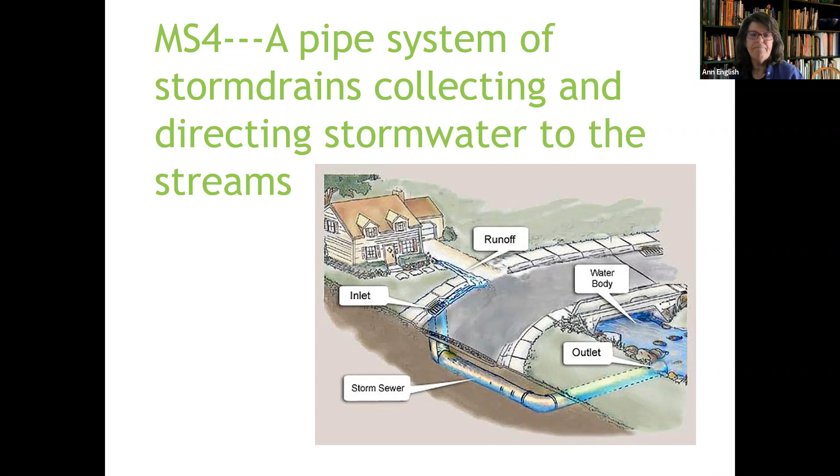So stormwater runoff happens once water hits the ground and doesn't soak in. So rainwater goes over the top of the ground, off of roofs, driveways, roads, and sidewalks. It picks up everything that it encounters along the way, including chemicals from our lawns.

Montgomery County has a new pesticide law, and some of the municipalities have accepted this as their law also, and others haven't. So you can check to see if you're in a jurisdiction that is following this pesticide law, or at least follow the practices on that county initiative. Chemical fertilizers actually contribute to climate change because of all the off-gassing and nutrients.

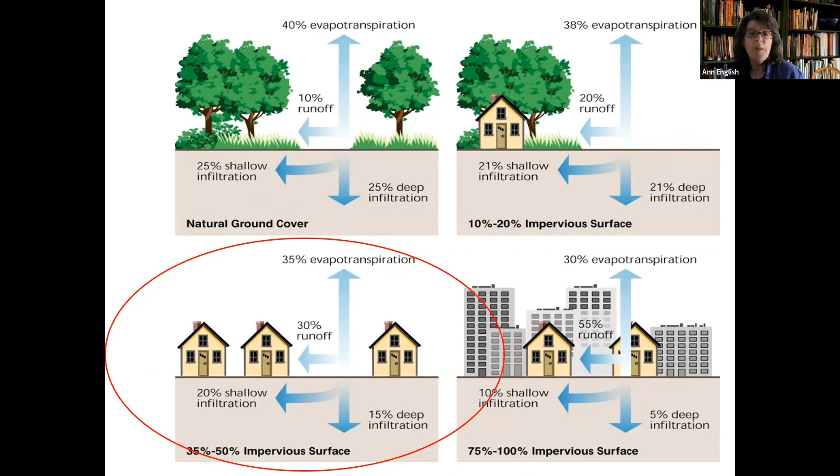So what happens with these rooftops and roads? 30 to 40% of total impervious area is just on rooftops alone, and that's on private property. And 25% is in the roadway. So that's almost 75, 80% on private property.

So people wonder, why do I have to do something? Why isn't there stream restoration? Why isn't that sufficient? I'm doing everything the way I was told to do it, and yet you're telling me I have to do more. And I'm telling you, that's right, you have to do more.

Because these impervious surfaces are part of our problem. That water flowing off a roof in the summer can reach 140 degrees. Have you ever stood in a gutter when it's raining in bare feet when you were a kid? It was hot when it first started raining and then it got cool. That's the temperature surge that hits our streams, and all those little bugs and little fish are very sensitive to temperature. That's why trout streams have to be cold, because the trout can't live in a hot stream.

If you've lived in this county for a while, you might have heard stories. One of our wildlife biologists, he's an aquatic biologist actually, said that his grandfather could catch trout in Sligo Creek. Imagine that, that highly degraded stream we've been working for decades to try to restore used to be clean enough for trout.

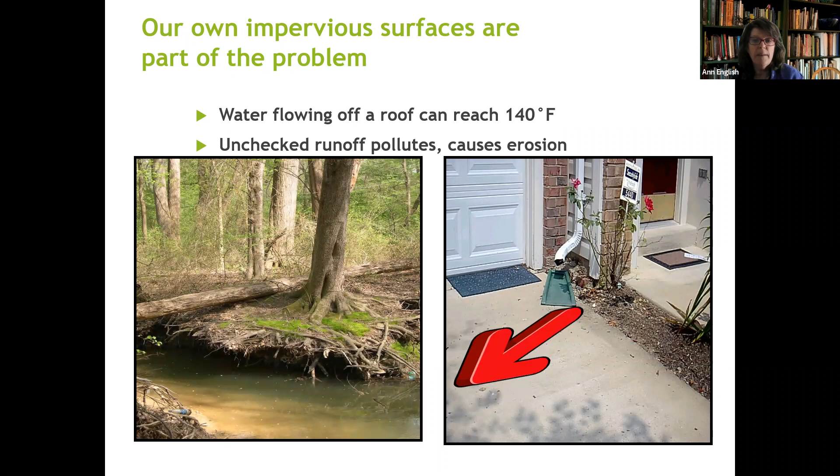What happens with this unchecked runoff, in addition to temperature, is you see the trees start to get undercut on the bank. And then you have tree failure. So what's the impact of it? Let's just go through the litany, shall we?

Trash, soil and sediment, fecal bacteria, that's from all that pet waste, nitrogen and phosphorus, oil. If you've ever watched people dump stuff down the storm drain, whether it's grass clippings or they've just changed the oil in their car, that's not a trash can, but people think it is a trash can. Road salt is also causing impacts in some of our streams, and it's also contaminating groundwater. And then toxic metals, copper could be from downspouts, lead and zinc typically from brake linings get on the road, and these all get flushed away down into our streams.

Just to give you the more visual graphic, this is what's in stormwater runoff. I was horrified when someone said, oh it's so great, we live in a neighborhood with a stormwater pond and the kids go swimming in it. I said, do you have any idea what your kids are swimming in? It's not nice, don't do it, don't let them in there. It's not clean water.

But in addition to all that volume carrying all that other stuff, what happens to the stream banks themselves? A stream bank is supposed to have a nice V-shaped profile. That's a healthy stream bank, because then as the water rises it can spread out, and maybe it's got extra nutrition. The Egyptians knew that in the Nile every year - the Nile would flood, it was a fertile river valley, and our valleys always got the extra nutrition, and those trees needed it. So now we're depriving the trees of that.

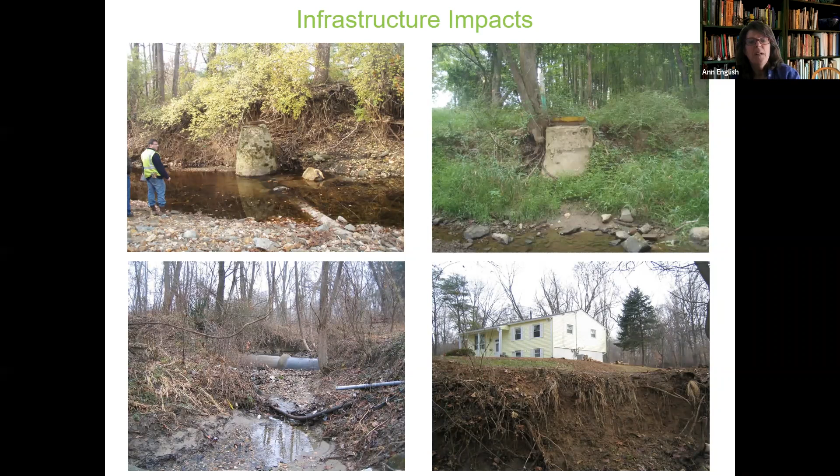So kids are probably running across that thinking this is a lot of fun, and maybe some wildlife too, but the fish can't move. People are losing parts of their yard. People are alarmed. In my professional life, I get videos when it rains and people are like, I've never seen this before. And with climate change, we're going to see it a lot more.

People that responsibly pick up their pet waste and put it in a bag and then set it down beside the path, that's not responsible. That's what happens to it. It hangs up in the tree roots, just all of this silt. One of our biggest contributors of suspended solids, which is silt, to the Chesapeake Bay pollution load from a county like ours is actually from our stream valleys, right from the stream itself, because this is being eroded and it moves downhill.

So it's interesting, I had reordered that slide. Infrastructure was built to be efficient, so you go straight. Now we want it to meander. We want it to meander.

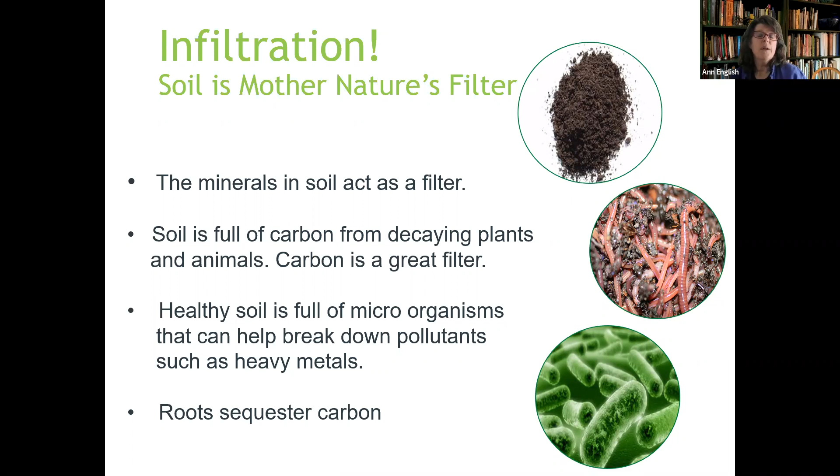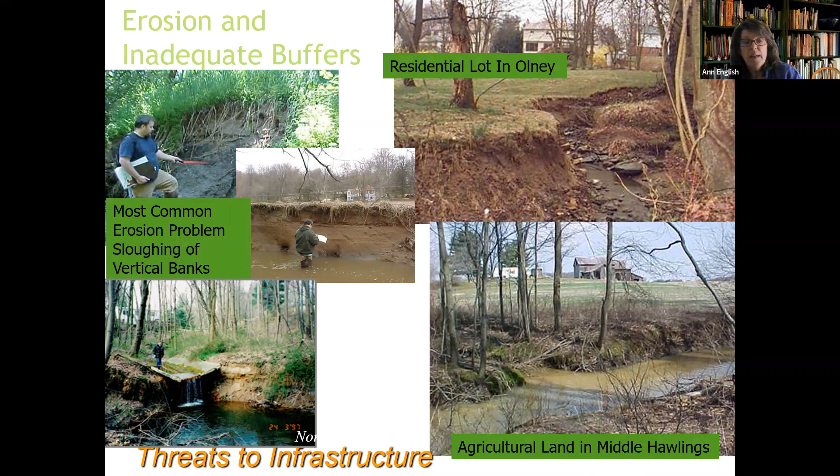So one of the things we did with the first projects at Christ Church, we focused on a small area in the front, but we focused on soil. I talked about soil because soil health is really, really important. Carbon is a great filter, and as we improve our soils, we will improve its ability to filter and treat that water. This erosion and inadequate buffers is really going to kill the bay, and that's almost a metaphor for killing us. We're slowly suffocating underneath the silt we're adding, the debris we're adding.

There was a woman who called me at work last summer after a big rain. She had two windows in her house blow out because of flooding.

So why should we care now? Stormwater is becoming an ever bigger source of pollution to the Chesapeake Bay. Ag runoff still contributes 40% of nitrogen and 50% of phosphorus. So there's still a big sector, but that also leaves 60% of nitrogen contributions and 50% of phosphorus coming from somewhere else. And that somewhere else happens to be development.

Among other things, some of our important natural filters, according to the Chesapeake Bay Foundation, such as forest and oysters and underwater grasses, we've lost 98% of the oyster beds. And oysters are very sensitive to sediment.

The pictures on the right are actually coming off of Norbeck Road. These pipes are just dumping all kinds of stuff into the streams, and they just can't handle it. Imagine trying to drink from a fire hose and not getting a break from it. Even the first second would be damaging, but then it keeps up for hours. It's amazing the streams have held up at all in any way.

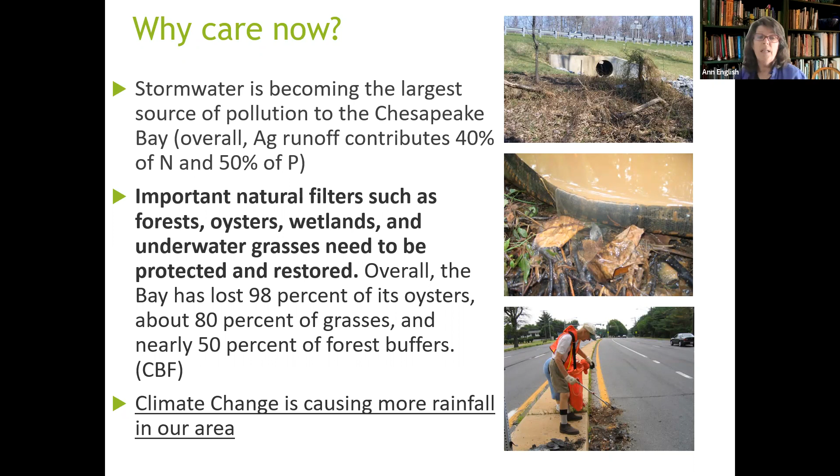And so there's less time for recovery between events. We armor the lower streams because of this gray funnel effect that we have had in development, the upper right.

So this is how we used to do stormwater. We efficiently channeled it from the parking lot into a pipe into the storm drain. And EPA really pushed and is pushing for municipalities and individuals to go upland above where the low points are,

and to treat that landscape as the green filter that originally was, and to restore that biological function. The picture on the bottom left is of Aspen Hill Library. This was a retrofit that Montgomery County's DEP installed off of Aspen Hill Road. This is in July, and it's got a 4-foot media bed.

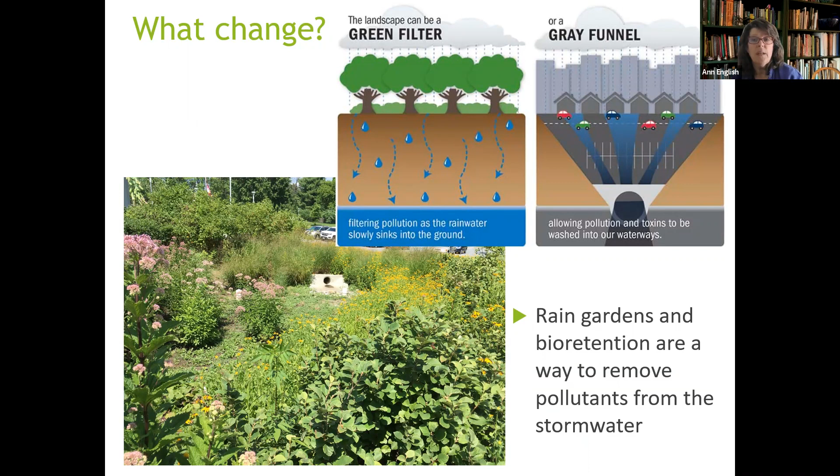It's got under drain pipes. So it takes all the water from the storm drain in a trench drain, puts it in a pipe into this huge garden, and that garden fills up with water, and then it soaks through. So by the time it goes into the storm system, it's had a whole bunch of stuff cleaned out of it, and it's released more slowly because those plants are using that water, so there's less volume. It's a really great project.

The old approach to stormwater management simply put it to the bottom of the hill and concentrates the water flow of pollution. The new way is the rain garden and the conservation landscape that is capturing water, even if it's not ponding water. It's roughening the surface.

This is an example of a residential rain garden, and rain gardens always have this thing called a berm or a dam, but you can see how this designer has cleverly put a walking path along that berm. So it's all functional.

Other organizations have taken it upon themselves to do things. This was a bat mitzvah project of a girl at the Hebrew Academy off of Arctic Avenue. That's in the Rock Creek watershed. And her Torah passage was on water. And she really took it to heart and led a project that had trees and conservation landscaping and a rain garden.

St. James off of Seven Locks Road also has a rain garden right here. And they've inspired their neighbor to do a big project, which is a grant project, Beth Shalom. And the two together are reducing runoff into Cabin John Creek.

Colesville Methodist has a demonstration rain garden outside their preschool, and they also have another project along Randolph Road. And they're using it to illustrate that they are living and walking the values that they're learning at their congregation.

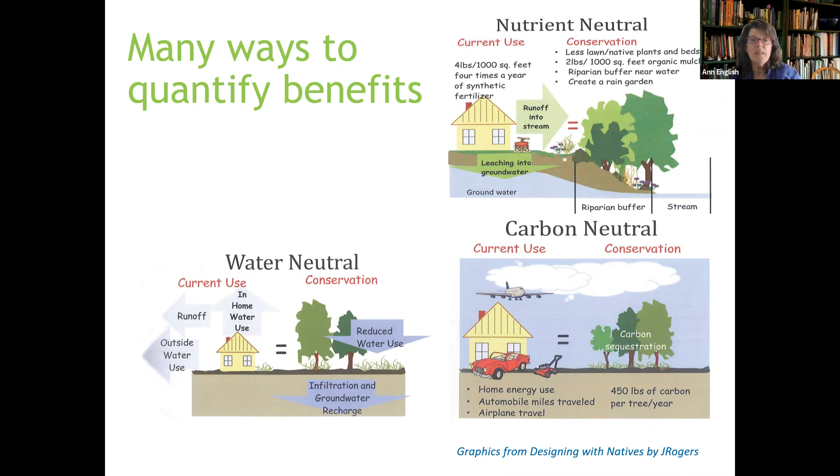Or maybe you look at it from a carbon neutral. You're not having to mow it. You're not having to use fertilizers that have a high carbon footprint. You're sequestering carbon because you're improving the soil tilth, and you're doing many things like tree plantings that are sequestering carbon. 40% of our carbon is terrestrial. That's where we have to put carbon. This is the easiest way to help reduce carbon and greenhouse gas effects is to sequester the carbon. And the easiest way is to enlist plants to help us do that.

Another way you might look at it is environmental justice. This is certainly a topic that's getting a lot of attention these days, that people are not always able to live in a high quality environment. They don't always have access to a high quality environment. This congregant up in Harrisburg is there standing beside her newly planted rain garden, very happy, obviously.

And then they're training people. So some people are learning green jobs on how to maintain this stuff. So it's a win-win for the environment. It's win-win for the people that live in the environment. And the thing that you have to remember is we're all in this together. It's not nature there and us here. We're all here together.

So now I'm going to come back to Christ Church. I've kind of gone through that broad brush of what the issues are in our streams. So let's look at the campus of Christ Church. Where does the impervious runoff go? Right down here, right? And where is it coming from? And what's in that runoff? Why should we care what happens after it leaves the ground? I hope I've made some of the case. You know, have you looked lately though? Have you noticed that straight shot right down to that storm drain? Have you noticed that our exit drive actually drains right onto this parking lot? I did some measurements, which I'll get to in a minute.

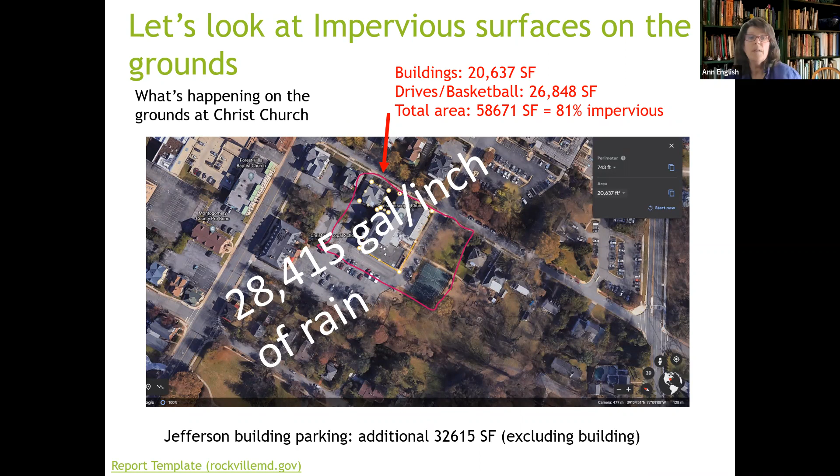So back in 2014, I asked, what's the story we're trying to tell when people see our building? And you know, we had the welcoming committee, we had the choir, we had our worship, that was on our website. We had the adult forum, we had Bible study and Christian faith, and we claimed that we practice what we preach, a ministry of Christian nurture. And the nurture that was featured was fellowship through coffee hours, dine and deal, ushering, English conversation, feeding people, worship and outreach.

There was nothing on the environment in 2014, absolutely nothing, even though it was the official year of the green sheep. St. Francis was held up as a patron saint of ecology. There was a Franciscan Earth Corps. There was an awakening that was happening right around 2014 with projects to emphasize and care for the earth and the Franciscan ideals of simplicity and sustainability.

In 2014, I posed the question, ever wonder what people see? And of course, what they saw was a do not enter, wrong way. They saw a degraded landscape, if they looked; most people were not looking. But I invited people to wonder if the outside package reflected our internal values, if it actually demonstrated that we believed that our faith was guiding what we practiced on our church property. And how did we present ourselves to the world? And what did we present on the outside to invite people in?

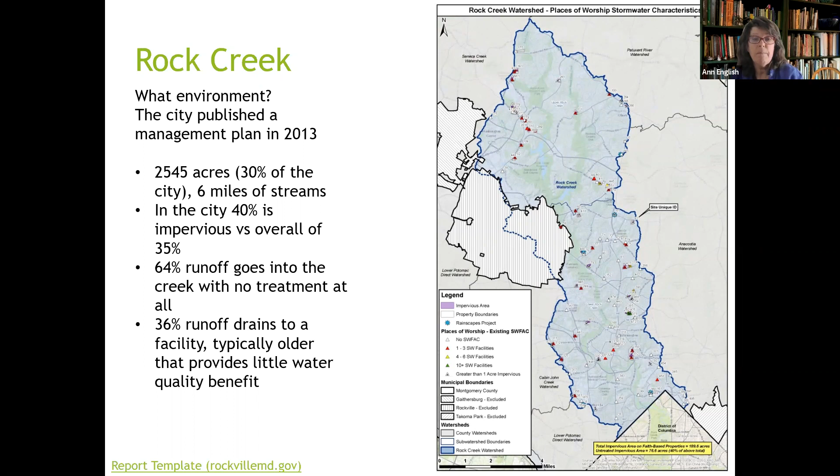And overall it's 35%. What was most startling is their statement that 64% of city runoff goes into the creek with no treatment at all. 36% of the runoff drains to a facility. So the runoff from the church does go to a facility, but it's typically an older one that provides little water quality benefit. So that pit in back of the basketball court and the church is really a flood control device. If the church was so inclined, if people were so motivated, they could try to lobby the city to do a retrofit of that facility as a bioretention. It could look like the Aspen Hill Library, maybe a little shadier.

But what is the call that you have personally to restoration as it applies to the earth and the Christ Church community? Are you interested in environmental justice? Then you should be working on stormwater. Stewardship of the earth? Well, I don't think the building grounds really fully has maximized how you could help with

our water. St. Camillus, which is down in the Anacostia, and Silver Spring Methodist have both been successful in installing large cisterns which catch their roof water. And then that at least slows the volume. It reduces the volume that's coming off of the buildings. We need to be protecting existing infrastructure so that funding doesn't have to go to repairing that infrastructure, and funding can go to other programs that are important to people.

Because of the slope nature of our parking, permeable pavers are a great concept for the Jefferson parking lot. But as we agreed, or I said, that property is no longer in our control. And most of our other parking spaces are on slope sites, which are more complicated. But there are a few spaces which could be a demonstration behind the parish house, where it's fairly level.

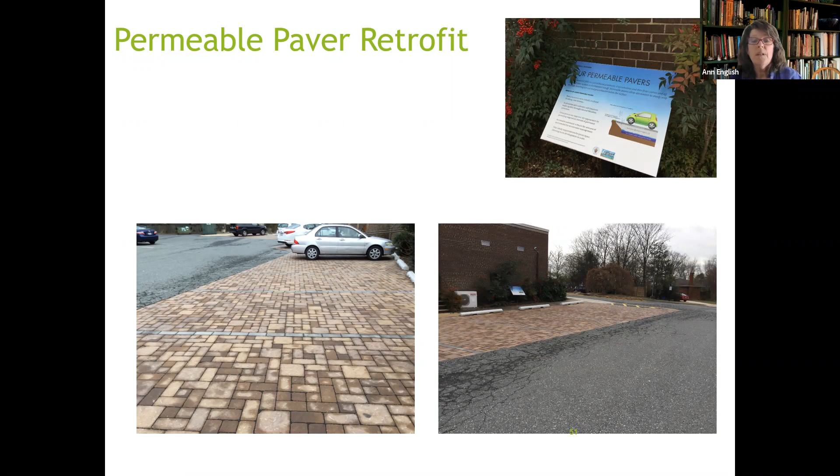There's a little terrace that we could look to do a permeable paver retrofit and capture a portion of the runoff and treat it rather than allow it to just rush into that stormwater facility. It may not be easy. Okay, so I did not turn off the sound on this, but basically it might not be easy to catch that water right where it falls. This is important. You want to catch that water before it picks up momentum and goes down the hill.

And so what can managing stormwater with a green infrastructure approach do for Christ Church? It gives us an opportunity to be outside together. This is really important. We've been in a pandemic for over a year. We haven't been in worship services indoors. We need to do more things outside. It could help with that, creating a welcoming atmosphere. We've taken some really good steps right around the margins. We can demonstrate our environmental values.

More people can participate, whether it's as families or as committees, but there are more opportunities. There are stream cleanups that parks sponsors. There are other things that people can do. And maybe it can help inspire your stewardship and re-examine how you are working to help heal the environment that we live in. And maybe there could be some creation of an outdoor place of worship.